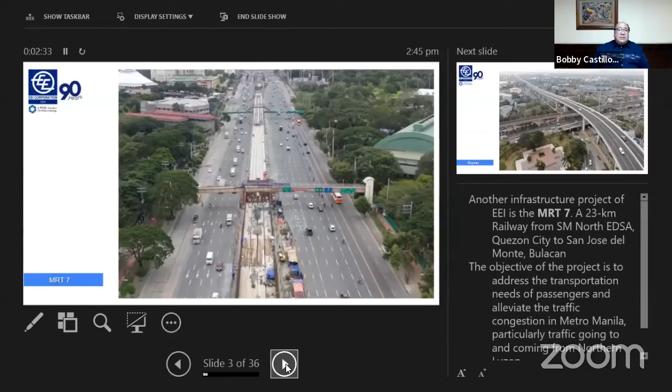The Skyway is the next project. This helps relieve the traffic on EDSA. It used to take me 2 to 3 hours to get to the NLEX entry point from Alabang. Now it takes about 40 minutes. This has been completed from Balintawak all the way to the extended portion in Sukat-Alabang, which goes down near Susana Heights.

I'm showing you these because these infrastructure projects help reduce the wasteful energy we spend on the road and on flying. Bigger jets are more efficient, and railroads carry more passengers on a per car basis.

We also build warehouses. This is berth number 6, which we built in the International Container Port together with Hanjin. We also recently constructed 2 warehouses in Silangan for SM. The floor area of one building is 4 hectares, the other is 2 hectares.

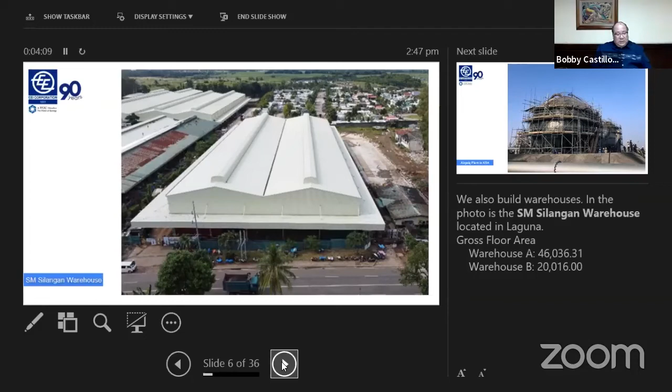This is a petroleum production facility in Saudi Arabia that was damaged by an aerial attack. We don't know who attacked it, but we were called in to fix it. This facility provides half of Saudi Arabia's output for distribution throughout the world. 900 of our people who were about to take a vacation during the attack were requested to stay in Saudi instead of coming home for Christmas, and they worked to get it back into production in about 2.5 months.

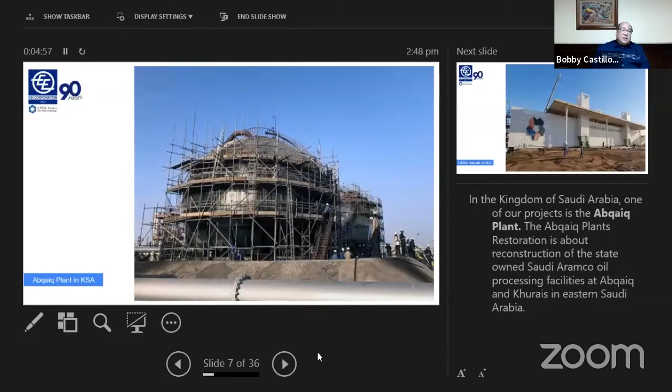We also built some civil structures in Saudi Arabia. This is an example of a recently constructed facility for the Neom Hospital on the northwest side of Saudi Arabia. It's not a very big hospital, but it's comparably large compared to Philippine hospitals.

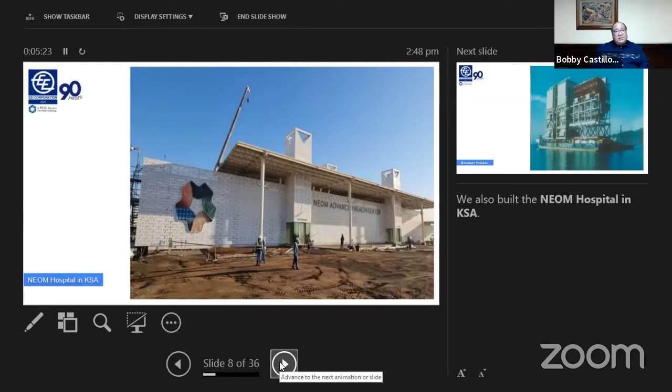The next photo shows something we do in Batangas. We have a steel fabrication yard in Bauan, Batangas, where we build modules, meaning we assemble parts of things. In this case, this is part of a power plant destined for Maizuru in the Kansai area of Japan. Other modules assembled in this facility went to Okinawa. The client here is Mitsubishi Heavy Industry, building a power plant in Japan for Kansai Electric Power.

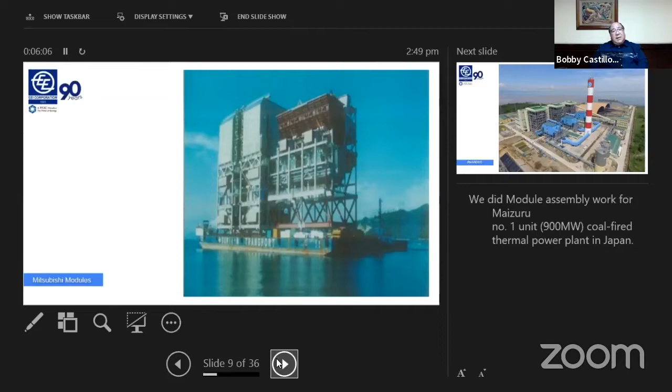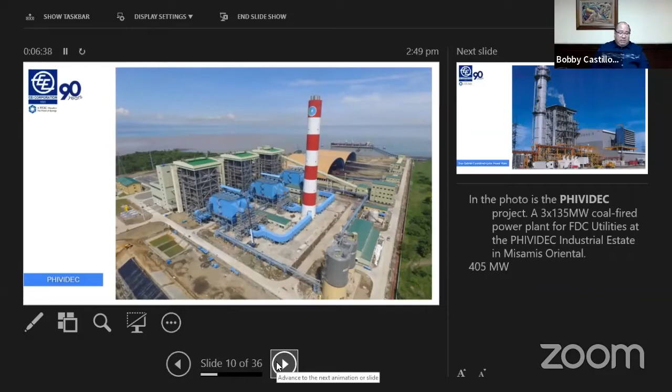One of the recent power plants we completed in the Philippines is the PHIVIDEC in Misamis Oriental, owned by Filinvest Development Corporation. These are three 135 megawatt power units, which we built together with the Chinese, for a total of 405 megawatts in this facility.

The next one shown here is the San Gabriel combined cycle plant, a power plant in Batangas using gas from the Malampaya gas field. This is 414 megawatts.

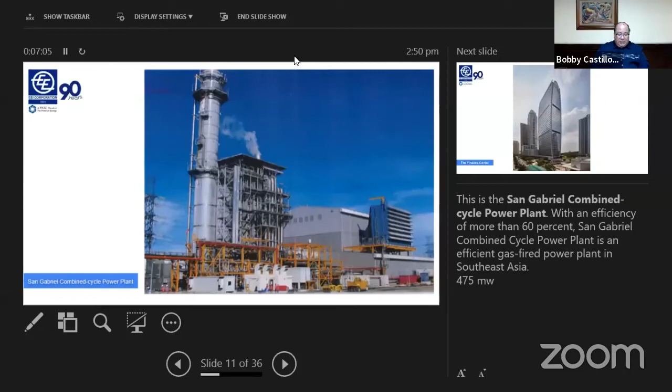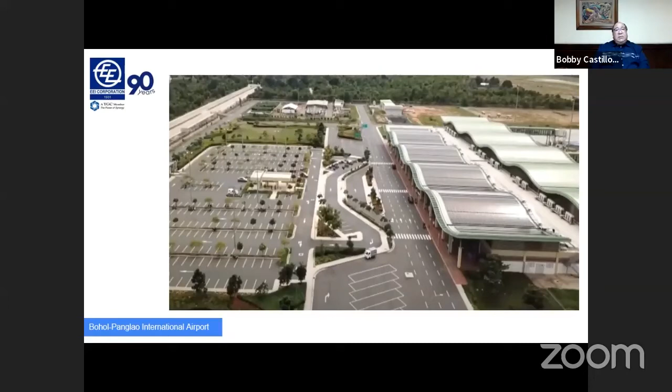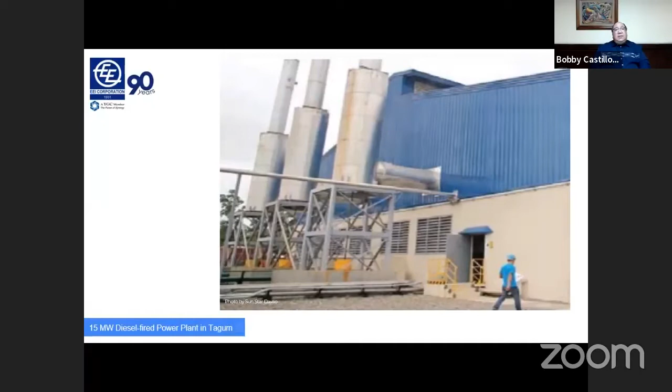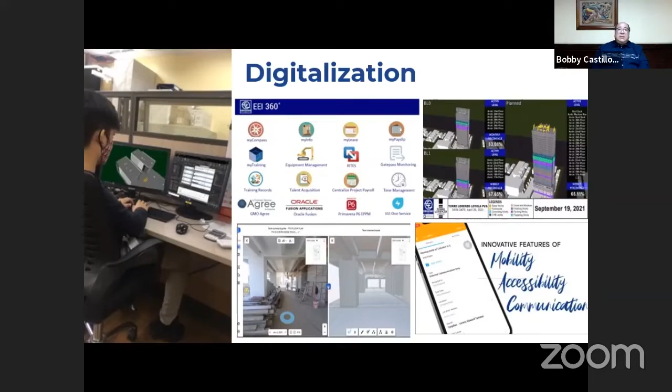We adopted them, one of which, when we were allowed to start work at our job sites, we were able to have eyes on, we had visual contact with the facilities through the rollout of this open space, where photographs are taken regularly by a guy who wears a camera on his hat, and the camera takes 360-degree photos of where he's at. And we are able to compare the progress photos with our plans.

The plans have been digitized before the pandemic hit, and we really rolled out the digitization of our plans, particularly in the use of building information modeling. It's very useful, and now we have been able to integrate our building information modeling with our P6 Primavera, and our people are finding this very useful in the review of the projects, the progress, and also for the planning, including the resource provisions.

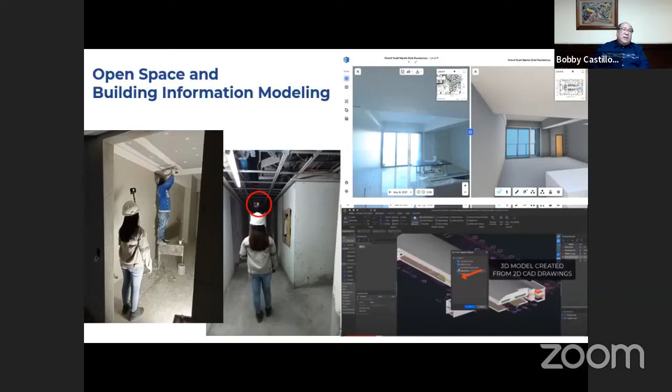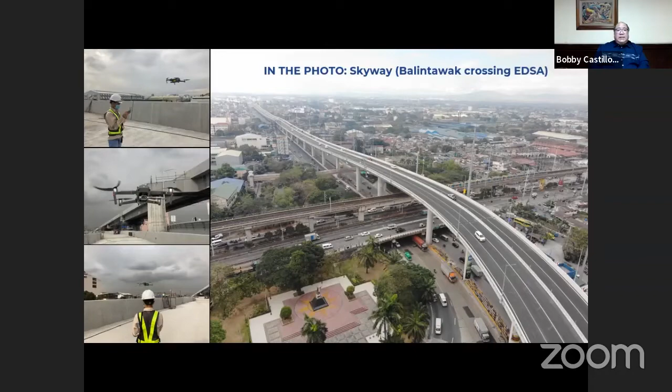We also have aerial eyes by using drones equipped with cameras, so that instead of us driving through and doing a physical inspection of a facility like this, the Skyway - this is the Balintawak segment of the Skyway that goes over EDSA - we fly our drones regularly to supervise the work of our people.

And of course, as we are doing now, we are meeting virtually. Virtual meetings and celebrations have been the way to go for the past 2 years. We even celebrated our Christmas parties and retirement parties and welcome parties through Zoom. I've never attended so many events in front of my computer without having to leave my home.

The other thing that we benefited from because of the lockdown, or because travel was restricted, was that our foreign consultants and specialists who were supposed to fly in could not fly in due to travel restrictions. So we bought these smart glasses. I think this is the Moverio brand shown in the photo worn by our guy. And he is being guided by a guy in Italy who sees what he's doing and can tell him what wires to install and where.

And this has been very useful for us because we are now equipping our people with these smart glasses, and we can ask them to walk through the job site and look at specific things that we want to look at on a real-time basis. Even our QC and safety officers are now able to see multiple job sites in a single day.

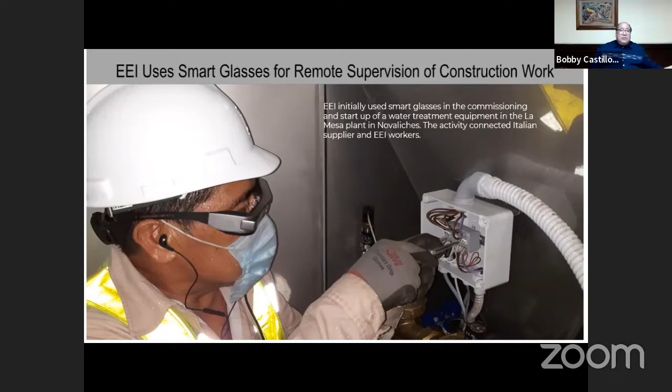So the dividend that we saw during the time our people stayed in our job sites was that we reduced the number of movements. The only thing we moved were materials delivered to the job sites from the sources and from our shop. We figured that our more than 19,000 personnel were able to save a lot on transportation, and carbon emissions were reduced.

The thing we can benefit a lot from are the things that we put in the buildings or other structures we put up. We use a lot of cement and steel in our construction, and we think we can reduce the amount of CO2 that cement and steel production entail. We were told that about 8% of the world's carbon dioxide emissions come from cement production, and about 9% come from steel production.

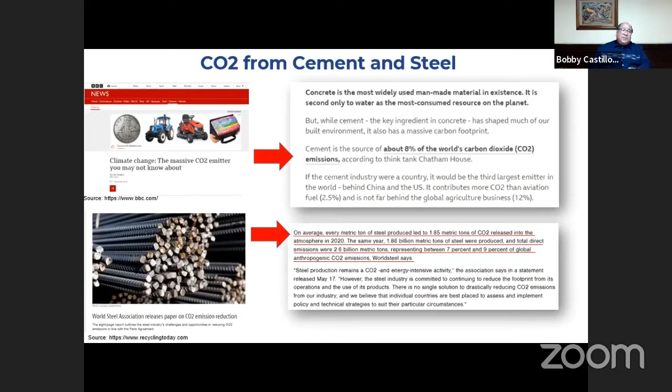We think that, together with the planners and owners of the buildings, we can institute value engineering work and collaborate closely, sharing the pool of knowledge we have, as was done in the Finance Center building, where the structural engineers really did a good job trying to reduce the amount of steel and concrete we had to put in that building.

The owners are now open to the idea of trying to save up, because the price of steel has gone up tremendously because of what's going on in Europe, and the amount of energy we spend on installing and mixing the concrete and pouring it at the site can be reduced if we're able to do some better plans and designs.

I understand there are now new design techniques being employed by architects and structural engineers that enable them to iterate very quickly. The plans of a high-rise building can be changed within 1 minute, and a series of iterations to improve the efficiency of the building can be done quite easily.

Last December 23, 2021, pretty close to Christmas, we raised 6 billion pesos by floating our preferred shares, as was described by the earlier speaker. The reason we did this was we were not so sure what was going to happen in the future, and we needed to have some buffer for any eventuality.

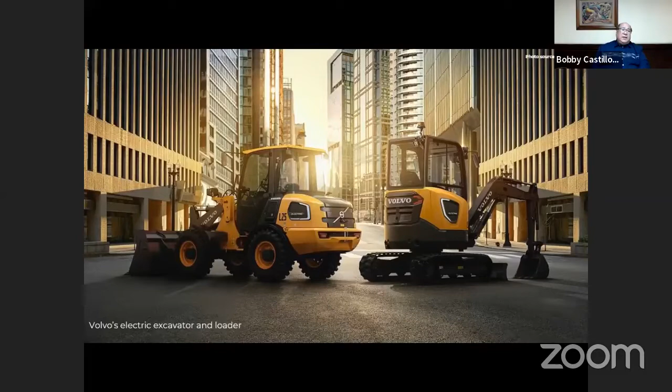So these are things that we're looking at, and there are more. We would like to invite everybody to try to look at this new thing so that we can protect the environment.